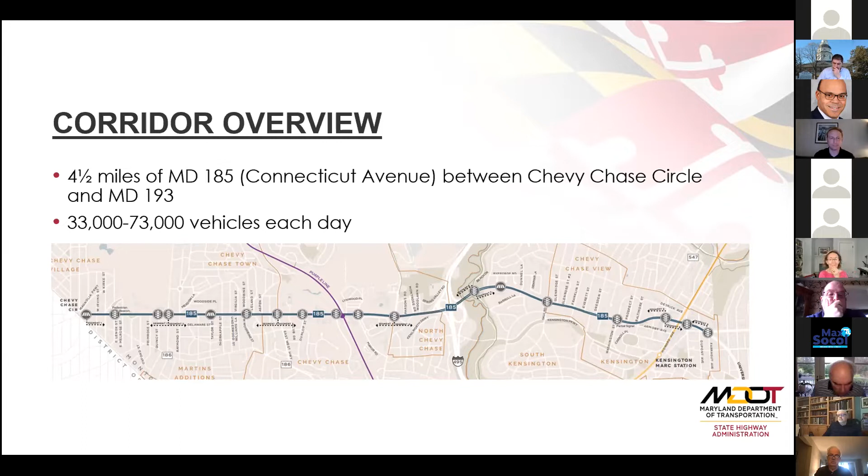Connecticut Avenue is a complex corridor. There's no question about it. Depending on where you're traveling, there are as many as 73,000 vehicles each day that we need to work to accommodate safely. And yet we also need to provide safe access and mobility for more vulnerable users, the pedestrians, cyclists, transit users, and others who use the corridor but are not driving. With the Purple Line arriving in the next few years and continued development in specific areas, we know demand will continue to only increase.

With that complex mix of users in mind, how did we approach this needs analysis? First, the analysis creates a vision, albeit a flexible one, for a corridor that better supports and balances access and mobility for all users, paying special attention to those more vulnerable users, a key point for MDOT SHA that our context-driven initiative has been placing ever-increasing emphasis on. Connecticut Avenue also is a long and varied corridor.

Our goal has been to strike the right balance based on the unique qualities of 6 subsegments. We'll get into that in a moment. Knowing that what might be appropriate in Chevy Chase or in Kensington probably isn't as appropriate, say, near the Beltway. Ultimately, our goal has been to propose a menu of preliminary concepts that can be advanced as resources allow, and that do so using little and ideally no additional rights of way beyond what SHA already controls. Some may move forward independently, some as a package, some may not move forward at all. The typical sections will show in a bit, show an ultimate vision for those various segments.

I want to reemphasize that these are preliminary in nature. Getting to that point where a recommendation can become a reality will require, one, public input. That's why we're here tonight and tomorrow night. It requires that political buy-in that was discussed earlier by Senator Waldstreicher, and it requires money. Let's be frank. So, through those various processes, various recommendations could move into detailed design and engineering, where MDOT SHA would undertake a much more in-depth investigation into specific needs and specific solutions at various locations. Though I will note, some of those very near-term, lower-cost elements already are moving forward, and Joe Mogus is going to discuss those.

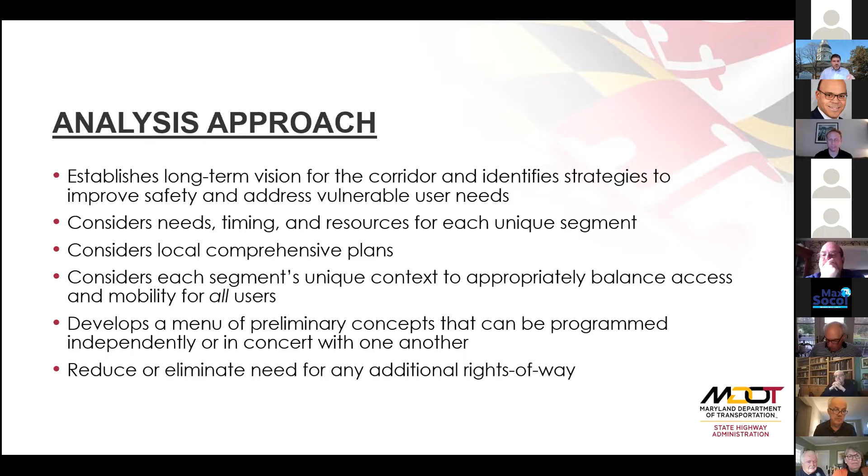I also mentioned context-driven, which heavily informed MDOT SHA's approach to this needs analysis. Candice Holford, our statewide bike and ped coordinator, is here tonight, and she leads that initiative, and she's going to give you a very high-level overview of its key goals. Candice.

Thanks, Matt. Can you hear me okay? We can.

As you mentioned, understanding context was a guiding component of this needs analysis. SHA's 2020 context guide outlines the framework for identifying what context zone you're in Maryland, and then applying the relevant engineering safety countermeasure. The guide states that planners and designers should understand the appropriate balance of access and mobility by classifying the land use as urban core, urban center, suburban activity center, traditional town center, suburban.

I think we lost Candice. I think I'm back, can you hear me?

Yeah, so the 6 contexts ranging from urban core to rural, and remembering that the most important part of the framework is that we're addressing all user groups—bicyclists, pedestrians, and motorists. This allows SHA to prioritize vulnerable users where safe access is paramount, and also encourage predictable driver behavior where mobility is critical. So Matt is going to get into the existing conditions along the corridor, and what our needs analysis showed us in terms of context.

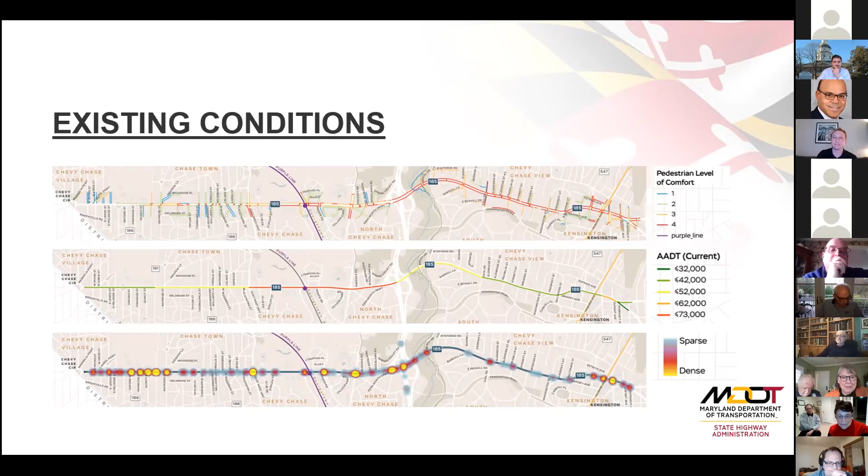Understanding the corridor is long and varied, and incorporating both existing conditions data and our context-driven approach, MDOT SHA chose to break the larger corridor into 6 subsegments. Tonight we're diving deeper into the first 3, all classified as suburban activity centers. The first is from Chevy Chase Circle up to Bradley Lane, primarily residential. The second is from Bradley up to East West Highway, again primarily residential. The third, which we'll also discuss tonight, runs from East West Highway north to Jones Bridge Road, which is more varied—you've got the Country Club, the Purple Line, and ongoing redevelopment. It's more complex than the first two, but also its own unique case.

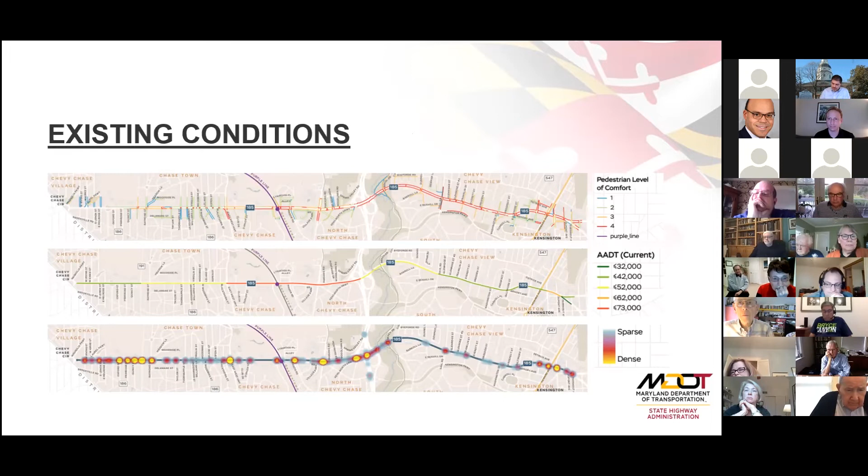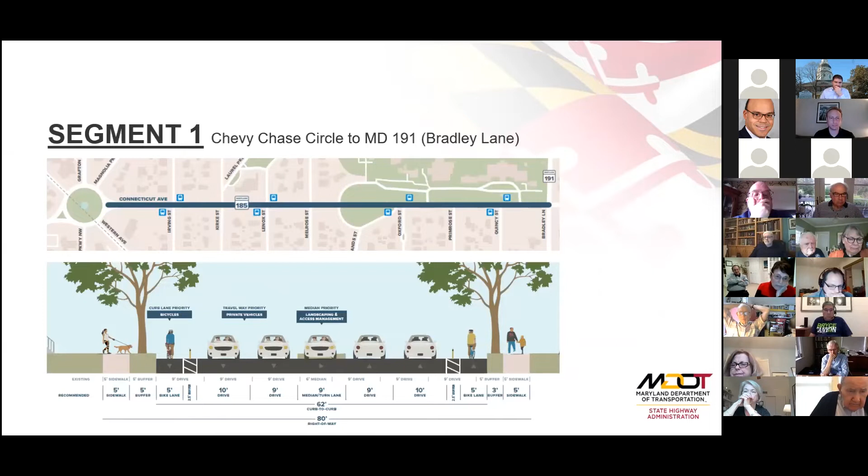So let's get into the segments themselves and the vision our analysis identifies. Segment 1 runs from Chevy Chase Circle to Maryland 191, or Bradley Lane, on the north side of the Chevy Chase Club. Today it accommodates 6 lanes of traffic, 3 in each direction. The segment is stressful for cyclists without dedicated facilities, and there are limited crossing opportunities for pedestrians, making transit access difficult. Of the 6 segments between DC and Kensington, segment 1 has the highest crash rate, though a lot of that is due to speeds—not necessarily severe crashes, luckily, but crashes nonetheless. So the question is: how can we better accommodate all users?

The needs analysis identifies an ultimate vision, if supported by additional analysis and design, in which a through lane in each direction is removed and replaced by a buffered bicycle lane, building on efforts underway farther south in DC. Today, dedicated left turn lanes are sparse—possibly non-existent in this segment—which causes significant backup. We're proposing more dedicated left turn lane facilities to remove turning vehicles from mainline traffic, reducing that backup. We're also proposing lowering the speed limit, both to increase safety and improve traffic flow.

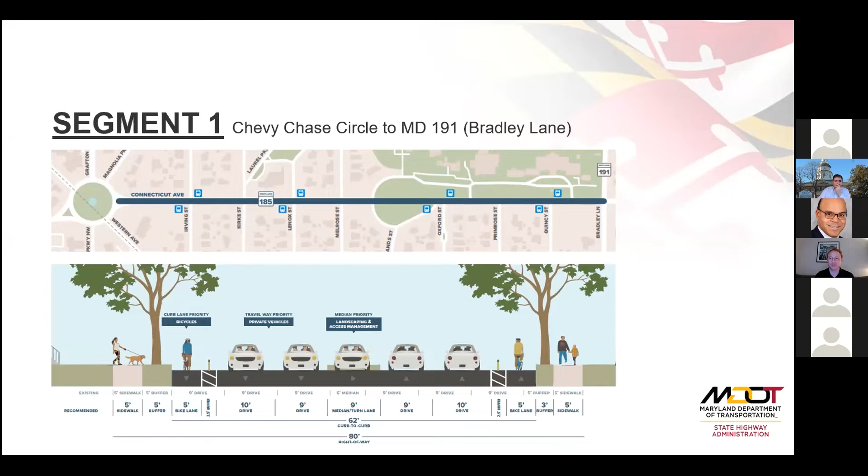Segment 2 runs from Bradley north up to East-West Highway. Today it also accommodates 6 lanes of traffic, 3 in each direction. Much like segment 1, segment 2 is stressful for cyclists with no dedicated facilities, and also has limited crossing opportunities for pedestrians, making transit access more difficult. So again, how can we better accommodate all users? The needs analysis identifies an ultimate vision, if supported by additional analysis and design, in which a through lane is removed and replaced by a buffered bicycle lane, building on the recommendations from segment 1.

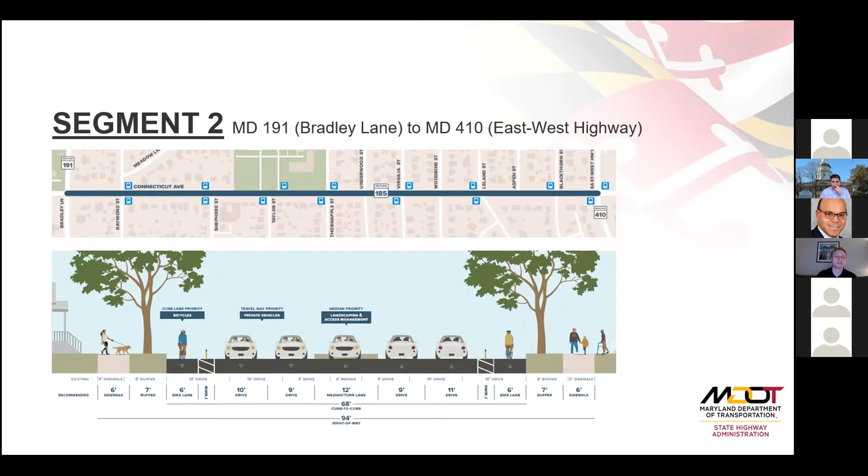Like in segment 1, MDOT SHA would introduce dedicated left turn lanes to remove turning vehicles from the through lanes, a significant cause of backups. Similarly to segment 1, they're also proposing lowering speed limits to increase safety and improve traffic flow.

In segment 3, where traffic is considerably higher than segments 1 or 2, in some cases almost double, MDOT SHA is proposing to retain 6 lanes and provide a dedicated side path along the east side of the roadway for cyclists and pedestrians.

There's a small segment under the Purple Line that is proposed as a cycle track instead. These recommendations are in line with those included in Montgomery Planning's County Bicycle Master Plan.

In this more open segment, MDOT SHA also suggests lowering speed limits and investigating local options to encourage automated speed enforcement, further examining options to restrict right turns on red, and introducing leading pedestrian intervals at intersections to give pedestrians a head start when crossing the street. That's going to be especially important with the higher pedestrian volumes we will expect resulting from the Purple Line.

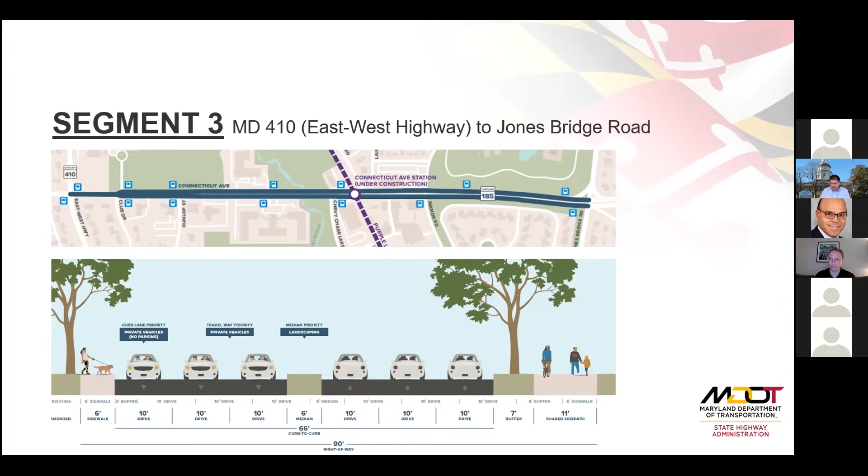So a little counterintuitively, I'm going to work backwards from long-term strategies to near-term strategies - you'll see the rationale here. Overall, MDOT SHA is recommending a wide range of potential upgrades.

All of these will require thoughtful and intentional investments over the long term. There simply are more needs than resources, so we're going to have to prioritize and focus those investments. But this analysis serves as a head start, providing MDOT SHA and local jurisdictions a coordinated menu from which to work to improve the corridor.

Piecing investments together over the long term, we can achieve full build out of this grander vision, again based on more community input and political buy-in. I wanted to emphasize again the flexibility of the document, but that grander vision providing safe access and mobility for all users throughout this key corridor.

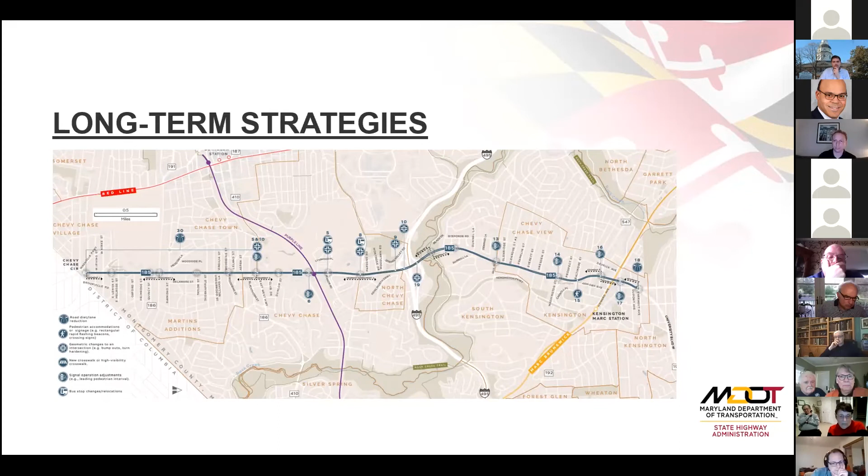In the long term, SHA's menu includes recommendations to, in some cases, modify roadway cross sections, including implementing road diets where appropriate to accommodate dedicated bicycle facilities or permit more width for pedestrians outside the curb. It also proposes recommendations to make geometric changes, including bump outs at intersections and reducing curb radii.

That means slowing turning vehicles, making them pay more attention to pedestrians and cyclists, increasing safety for both, and in some cases, rethinking or adding signals at strategic locations.

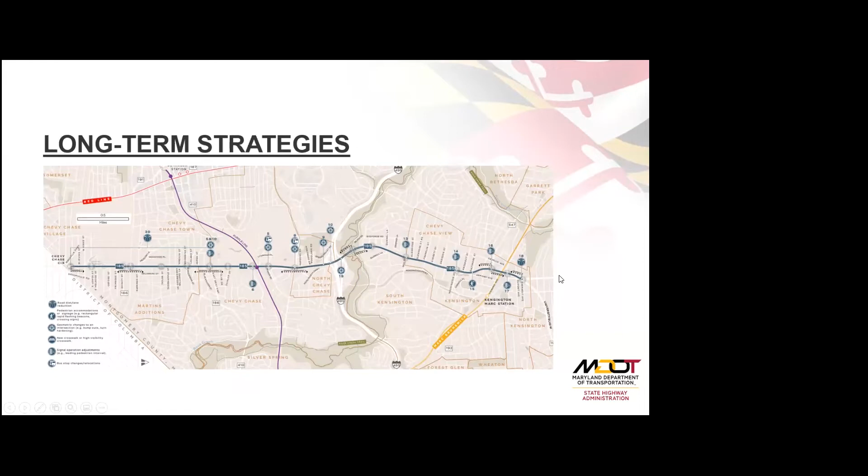Again, this is a pretty high-level overview. I definitely encourage everybody to take a deeper dive into the document online, and we'll provide a link here in a moment, so that you can look at each individual intersection. Where do you live? Where do you travel? How do you get to the grocery store? What types of things are we talking about closest to you?

Getting a little closer to today, in the medium term, we're talking about things like upgrading crosswalks to more visible striping. You've maybe already seen this in some locations. Traditionally, we kind of use the old two bars across the street, but modern research has shown us best practices in the industry now show continental striping.

Some people probably call it piano keys, some call it a ladder, that's much more visible to motorists, and it clues them in that much more that they need to be paying attention to people potentially crossing the street. So we've been rolling those out all over the Washington region in the last 2 years as resurfacing and striping projects have been available to us.

We're also talking about improving signage to increase motorist advance awareness of the need to be either slowing down and paying more attention in high pedestrian areas, etc.

As well as modifying signals to improve operations and increase pedestrian safety. There's a lot of medium-term strategies proposed in the document. We are looking to prioritize those.

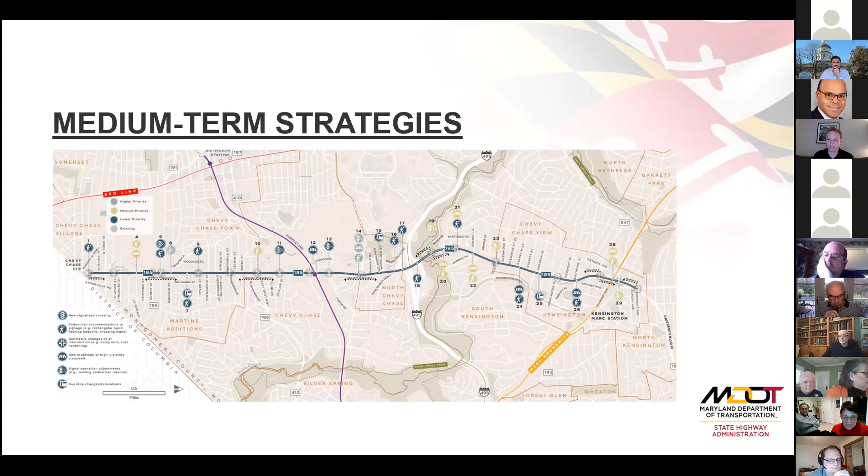Based on a couple factors: what's closest to schools? Schools are big pedestrian generators, and obviously some of our most vulnerable users of our system, as well as bus stops. And we want to keep a focus also on those locations where we know there's been a higher or more serious crash history.

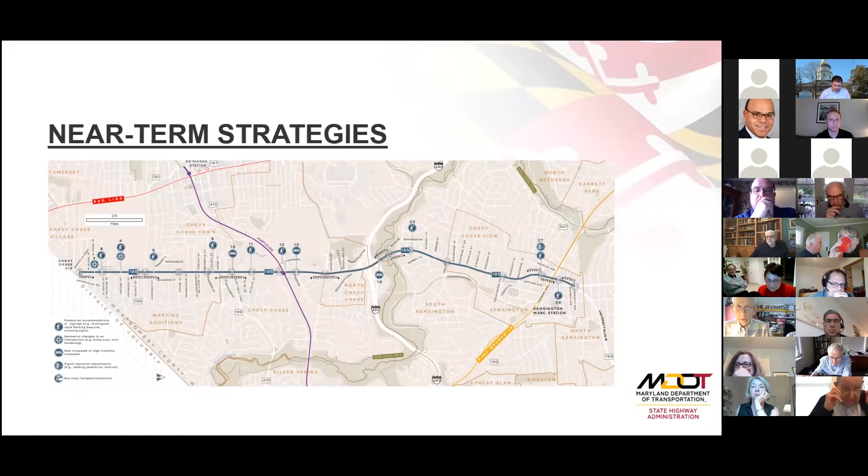In the nearest term, and some of these are already moving along, we're recommending things like using paint to extend curbs, lessening crossing distances at key intersections, upgrading crosswalks to make them more visible to motorists, and upgrading signage, including signage to emphasize various legal requirements, be that restricting right turns on red or requiring motorists to yield to pedestrians.

So I encourage you to take a deeper dive into the needs analysis report available on our website, link to come, as I've really only given a very high level summary here.

Before we get to that point, I want to ask Joe Mogus, who is with our District 3 office and leads our traffic section there, to walk us through a number of the near-term strategies MDOT SHA is already working on. So, Joe.

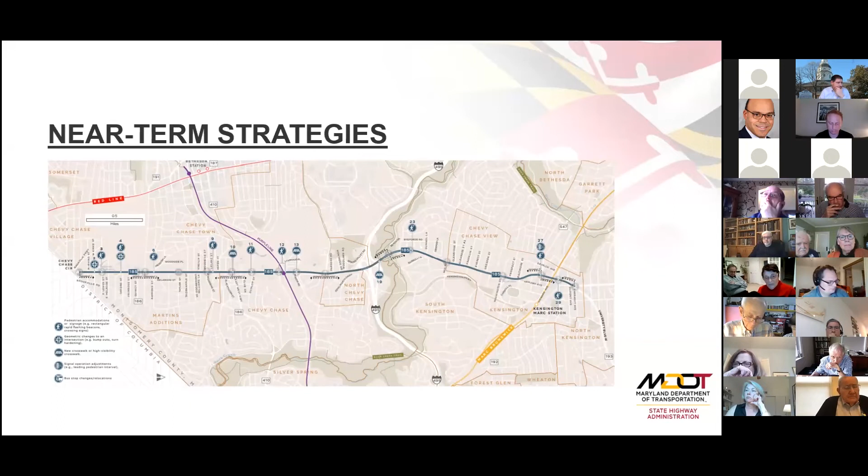Thanks, Matt. Can you hear me? Can I get a thumbs up? You're good. Okay, very good.

Good evening, everyone. My name is Joseph Mogus. I am MDOT SHA District 3's new Assistant District Engineer for Traffic for Montgomery County. Tonight I'd like to share updates regarding MDOT SHA District 3 improvements implemented in the past year or so, as well as forthcoming improvements in the next 12 months or so. As you'll see, there are several improvements suggested by the corridor needs analysis that were implemented during the study. MDOT SHA District 3 is continuously developing and implementing projects for various improvements for all roadway users, including pedestrians, bicyclists, and motorists. These improvements vary from simple tree trimming to improve sight distance, to signing and marking, to signal improvements.

I've labeled some of these improvements in numerical order from the southernmost point to the left of your screen, all the way to the northernmost point to the right of your screen.

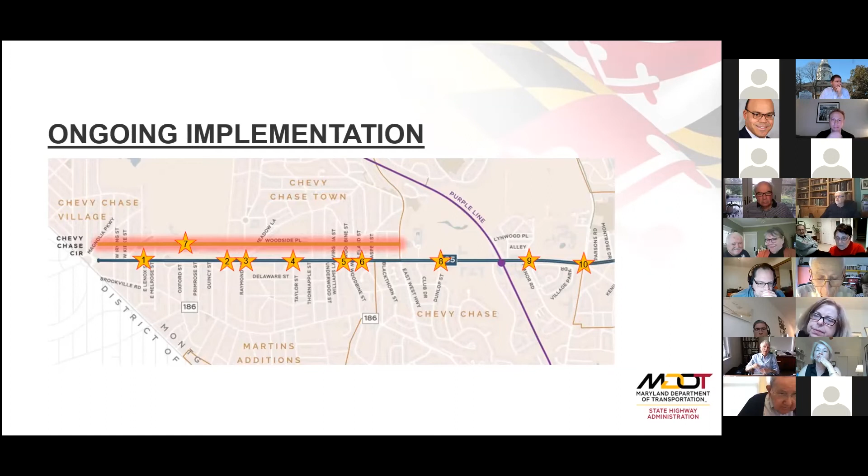Sorry, it's screen froze. Can you still hear me? Okay, sorry, one second. So we'll start with the first starred item labeled number 1 and proceed from there. Next slide, please.

Our first location is Maryland 185, Connecticut Avenue, at Lenox Street. Currently we have a hazard identification beacon, or HIB, across the south leg of the subject intersection. Following a series of reviews and analyses, we are happy to inform you all that we have found it appropriate to upgrade the existing HIB to a pedestrian hawk signal. Additionally, we will be upgrading the existing crosswalks to our new high visibility, or continental, crosswalk marking standard.

I can't see the slides, sorry. I can see them. Is anybody else having difficulty seeing the slides? They look great, absolutely great. I can hear, no problem. We will be sharing the slides, actually we already have with the delegation, and we can certainly reach out. But we also have contact information at the end, and if you would like to reach out, we're more than happy to get you the slides.

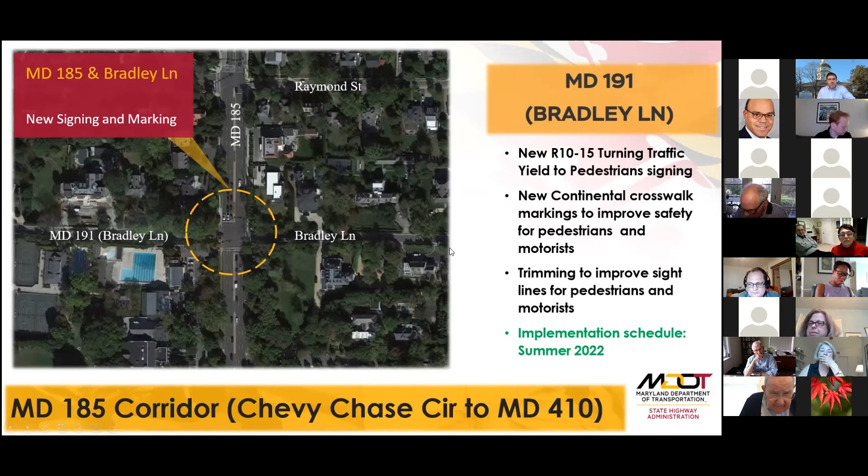Our next location is Maryland 185 Connecticut Avenue at Bradley Lane and Raymond Street. We will be installing our R1015 turning traffic yield to pedestrian signs at this intersection. Additionally, we will be upgrading the existing crosswalk to our new high visibility continental crosswalk marking standard. The implementation schedule for these improvements is slated to be complete by this summer 2022.

Our next location is Maryland 185 Connecticut Avenue at Taylor Street. We have recently upgraded the existing crosswalks to our new continental crosswalk marking standard. We have also recently installed new stop lines for both northbound and southbound Maryland 185 approaches. We will be installing stop here for pedestrian signing at this intersection. The implementation schedule for these improvements is slated to be complete by this summer 2022.

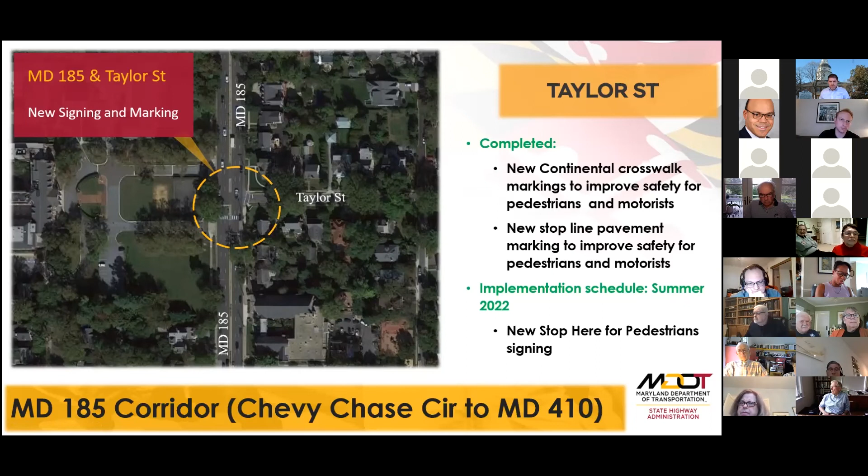Here we have the pedestrian crossing located along Maryland 185 Connecticut Avenue between Woodbine Street and Virgilia Street / Williams Lane. We will be installing stop here for pedestrian signing at this crosswalk. We will also be installing in-road pedestrian signing to further enhance pedestrians' comfort crossing the roadway. We will also upgrade the existing crosswalks to our new continental crosswalk marking standard. The implementation schedule for these improvements is actually more in line with fall 2022 - I think I made a little typo on this one, so this one's coming sooner than later.

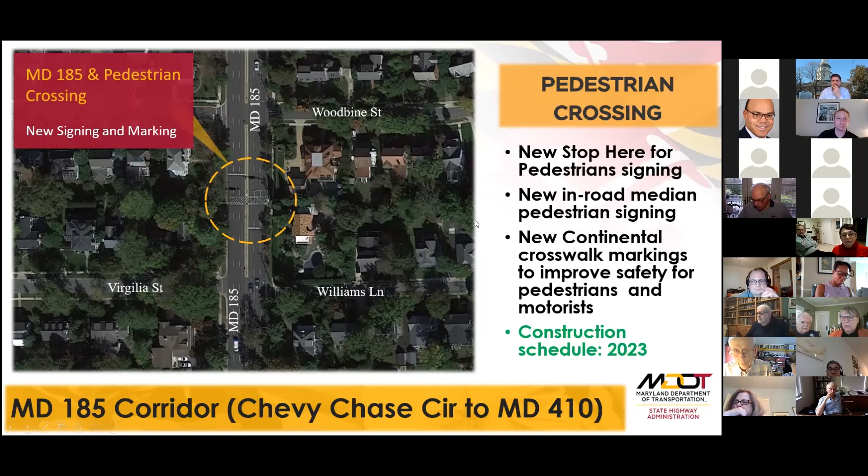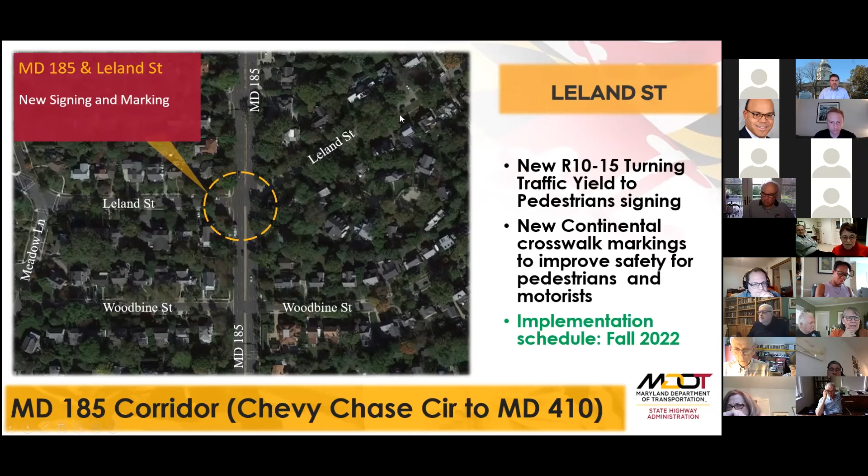This next intersection is Maryland 185 Connecticut Avenue at Leland Street. Similarly, we will be installing R1015 turning traffic yield pedestrian signing at this intersection, and we will be upgrading the existing crosswalks to our new high visibility continental crosswalk marking. The implementation schedule for this as well is fall 2022.

Here you can see we have Maryland 185 Connecticut Avenue from Chevy Chase Circle, or the DC line, all the way up to Maryland 410 East-West Highway. As you may already know, we have previously lowered the speed limit along this section from 35 to 30 miles per hour. I just felt it relevant with respect to this town hall meeting to bring this issue up as well.

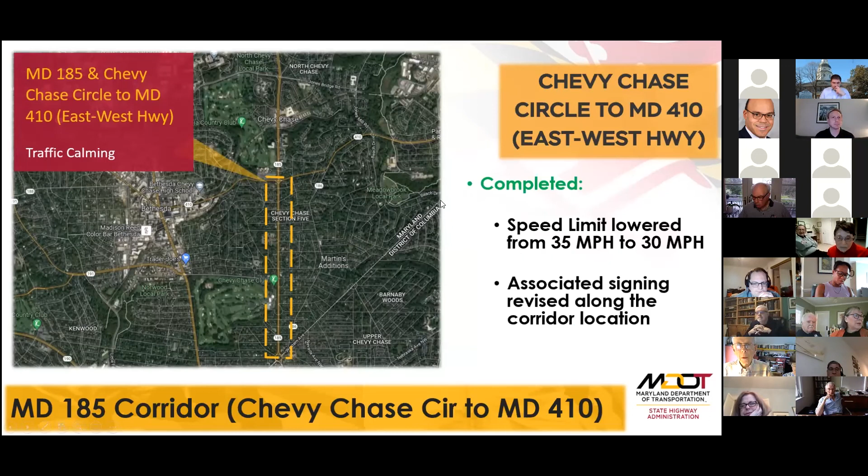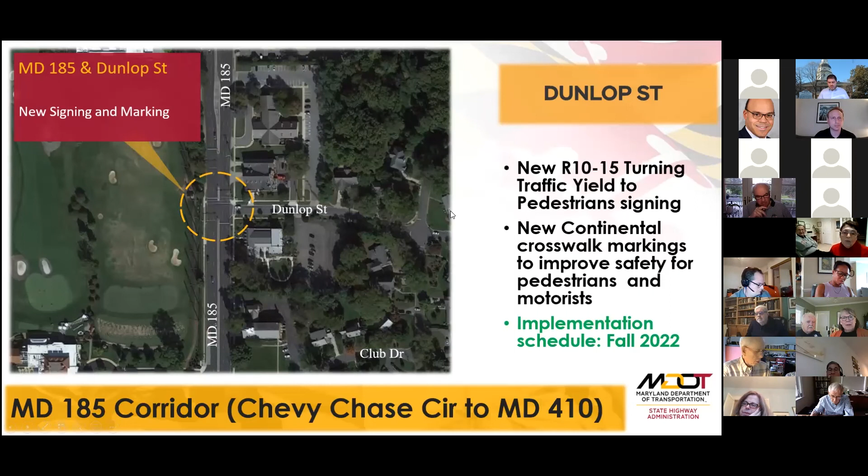We have Maryland 185 at Dunlop Street. We will be installing again R1015 turning traffic yield to pedestrian signing, and we will be upgrading the existing crosswalks to our new high visibility continental crosswalk marking standard. Once again, implementation schedule is fall 2022.

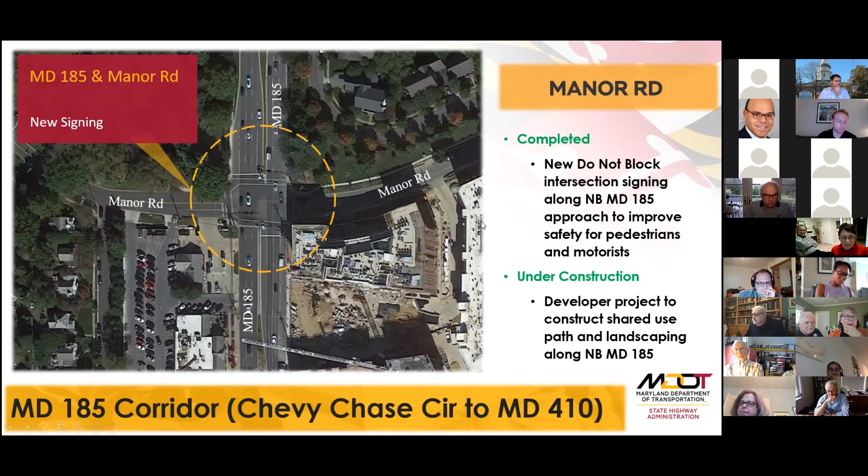Here we have Maryland 185 Connecticut Avenue at Manor Road. We have recently installed do not block intersection signing along the northbound Maryland 185 approach to the subject intersection to improve safety for pedestrians and motorists. As you already know, and as you can see in the lower right portion of the image, the developer project is well underway. This project will incorporate pedestrian facilities along its frontage, namely a shared use path and other aesthetic improvements. I should also note that the Purple Line station will be constructed just north of Chevy Chase Lake Drive, which is south of the image you're looking at here.

As you already know, the BRAC project is well underway along Jonesbridge Road through this intersection. That project will incorporate pedestrian facilities along the south side of Jones Bridge Road, namely a shared use path and other aesthetic improvements as well. And of course, there will also be an ADA compliant sidewalk on the north side, so there will be full pedestrian mobility here with an upgraded shared use path on the south side of Jones Bridge Road. I should also note that an additional third left turn lane will be constructed along the eastbound Jones Bridge Road approach to the subject intersection. This will serve to improve capacity and safety along this intersection and the Jones Bridge Road corridor westerly towards Maryland 355 Rockville Pike.

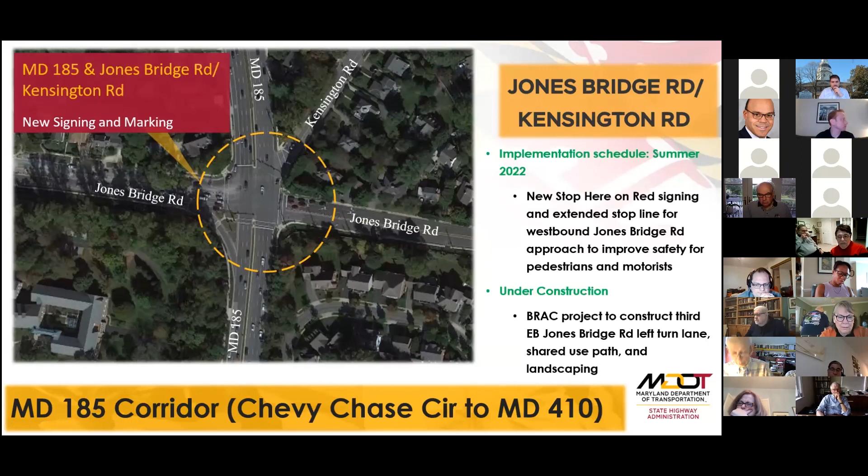I'd just like to take this time to state that we always have ongoing studies and initiatives, so please do not consider this a complete and final list of improvements. Let this presentation just reflect the volume of work already completed and soon to be completed as of April of 2022. With that, I'm happy to pass this presentation back over to Delegate Solomon and take any and all questions.